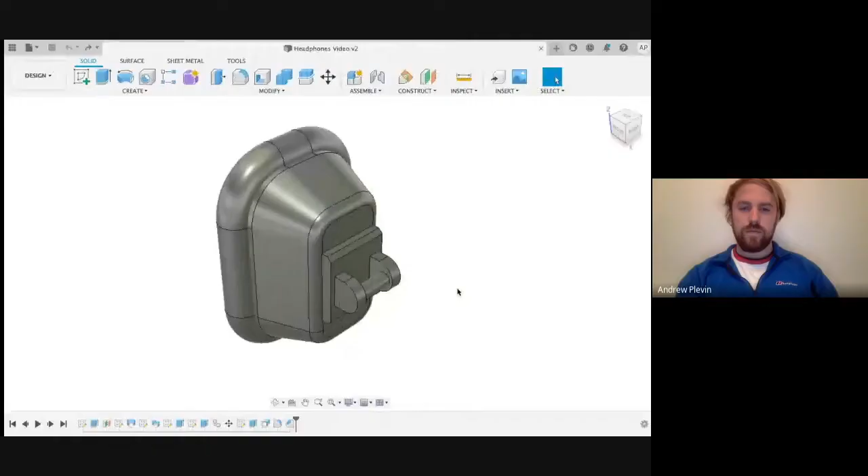So this is the point where you're hopefully up to now if you've been following the videos. In this video, we're going to create the point and the arm that connects to this hinge point here. We're going to start by creating a sketch on this inside face of our hinge.

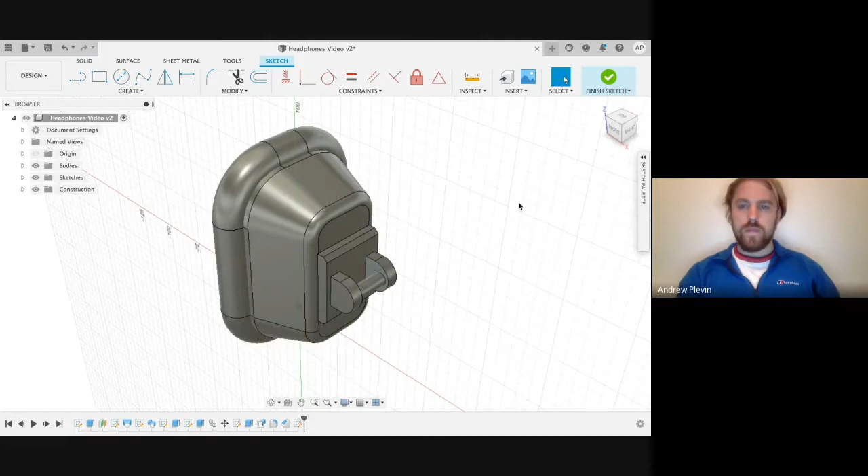We're going to zoom right in just so we can use our anchor points a bit better. And we're going to select the center diameter circle. You'll notice that when you hover over a body, it gives you points that you can try and use as anchor points, so we're going to use this center point here. You'll notice that the cursor changes to show you that it's found that center point.

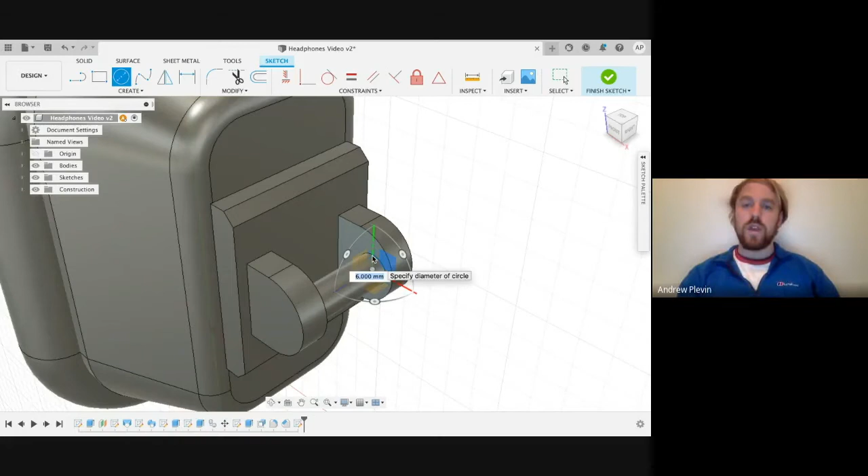Our first one is just going to be 6 mil, so it's going to match the circle we've already made. We're just going to drop it there. Then we're going to use the offset because we want to expand this out, by 2 mil this time. And we're going to click OK.

Then we're going to click Finish Sketch, and we're going to select Extrude from the Create panel.

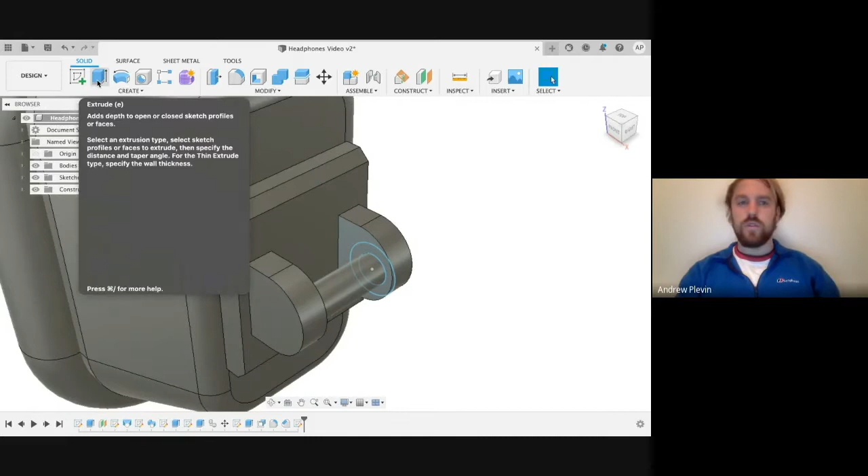Now, once again, you're going to need to zoom in and make sure you're selecting this small outer bit. This is the bit that goes further than our original body. So we're going to select both of those.

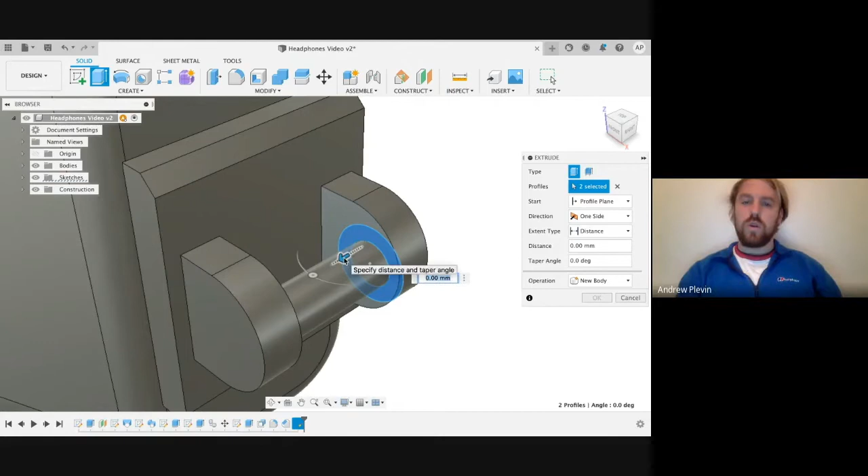But this time when we create the extrusion, we're not going to use the arrow or type in a value. What we're going to do is rotate around and click on the other inside face. You'll notice that our distance changes. We're going to change it to object, and it's going to be to this one.

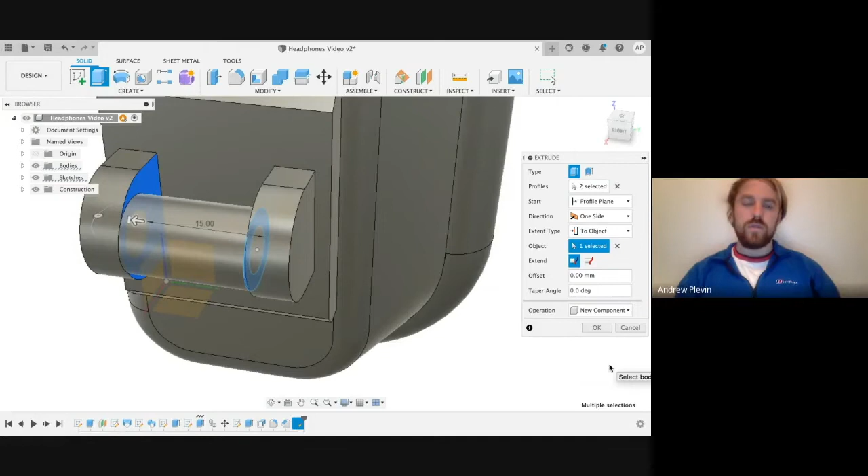This time though, in our operation, rather than join, we're going to have a new component. So once you've done this, click OK, and you'll see that it's added it here as opposed to in the bodies folder.

So at this point, we've got our component, and if we double click on it, we can rename it. This is quite helpful to do early on, as opposed to when you've got a massive selection of different components in your browser. So for now, I'm just going to label this hinge arm.

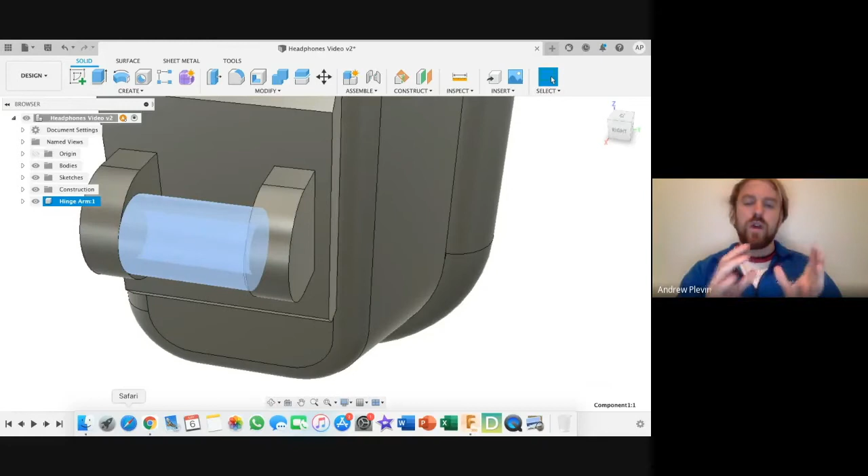And then if you look at the bottom, we've got a timeline of what we've created. In this, you can see all the different features and all the different tools that we've used to make our model so far. Later on, this is going to look very cluttered.

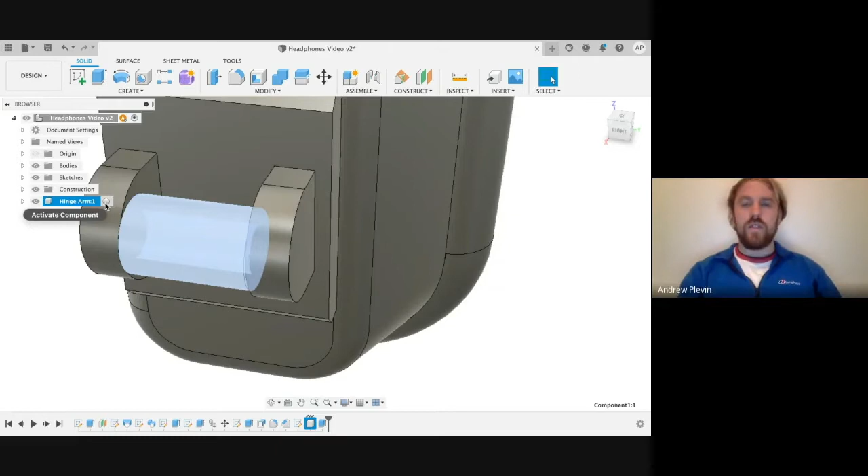So what we're going to do is hover over our component in the browser, and click in this circle to activate the component. What this does is it captures its own timeline within that component. It just means when you're trying to find different features that you've used or added, it's a lot simpler to find them.

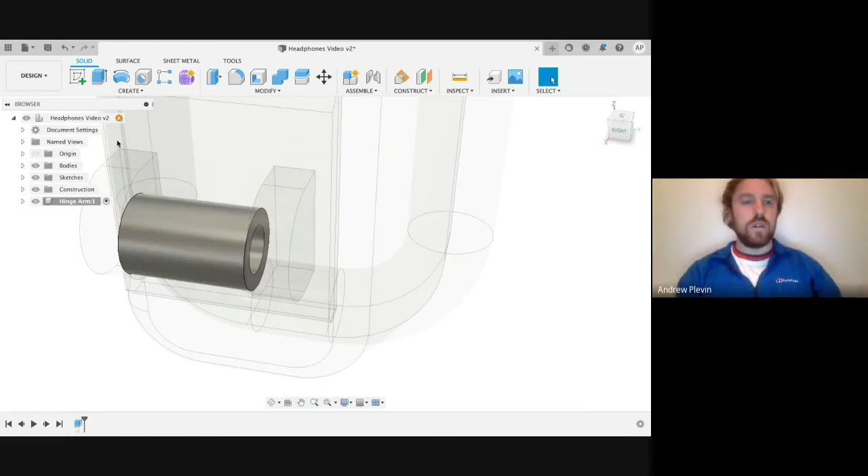So now what we're going to try and do is build the arm up from this circle, because we need it to extend out to be an arm to link to. So what we're going to do is create a sketch, and we're going to select this side face here.

What we're going to do is add a 2-point rectangle to this. We'll go to this center point again. Notice our cursor's changed, and we're going to follow it along, and you'll notice it adds little dashes to show that we're following that line.

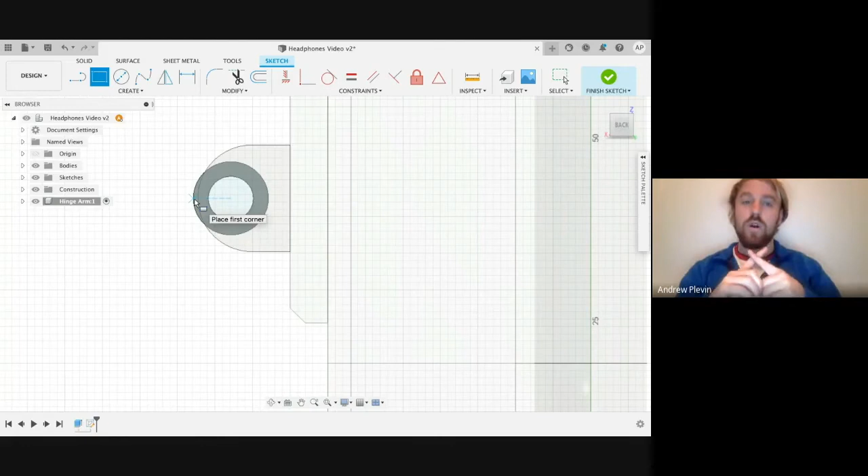We're going to follow that out till our cursor changes again to a cross. This is giving us the X factor, so this is what we need, showing us that it's linked to that edge of the body we've already created. So we're going to click there as our first point. It's not going to link to the one on the other side of the body, so for now we're just going to click at a random point, not too far along and not too far in.

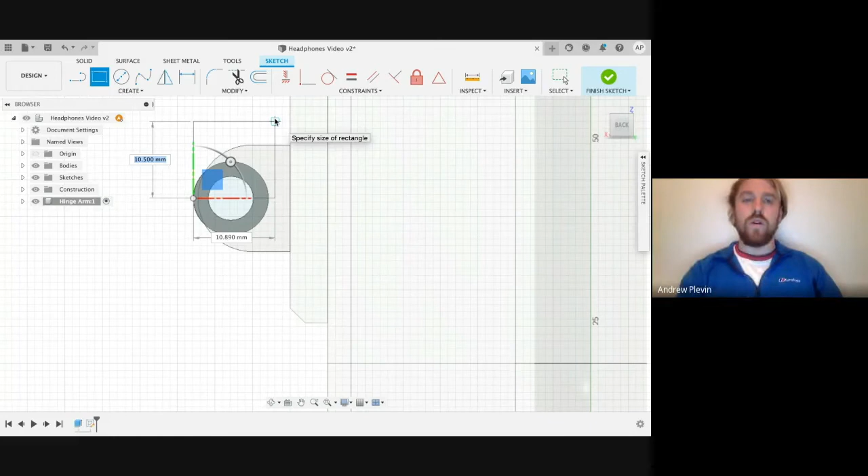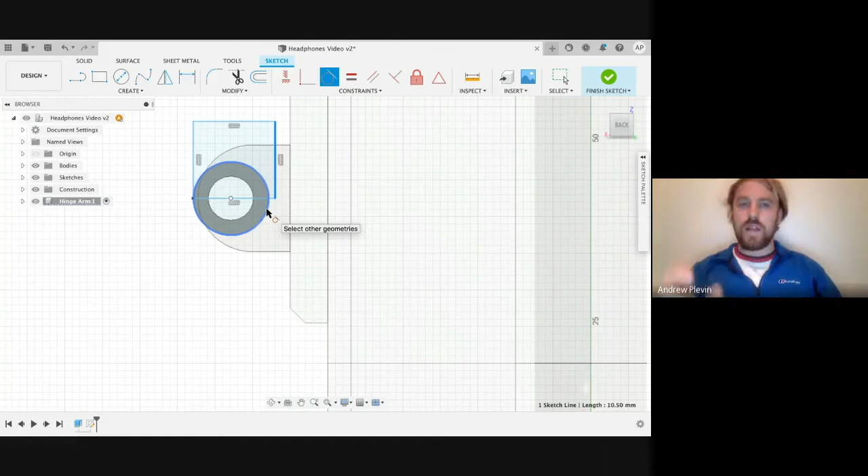So in order to make this edge here level with our circle, what we're going to do is select tangent. This means it intersects at only one single point. We're going to select that, make sure our edge is selected, and select the outer edge of the circle. You'll notice that it's added this constraint, and if we click on it, it tells us the constraint that's been added.

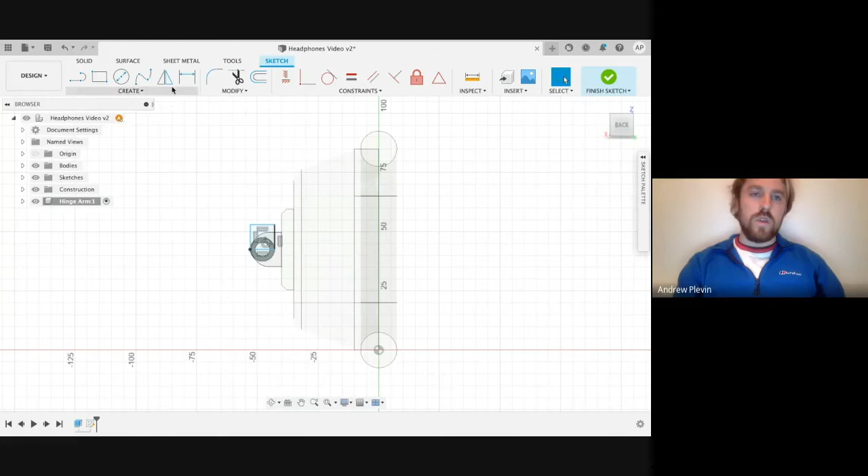Next, we're going to look at expanding this arm out, so we want it to expand out slightly past the top of our earphone piece. To do that, you're going to select sketch dimension, which just controls the size of something we're making. So if we select this edge to the left, our vertical edge, and drag it out and click again, it's going to let us type in a value. I'm going to go with about 80 mil for this one, then press enter.

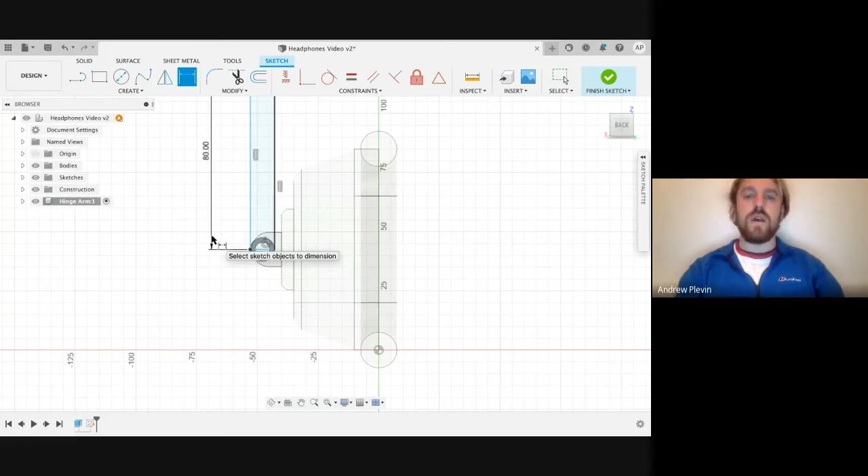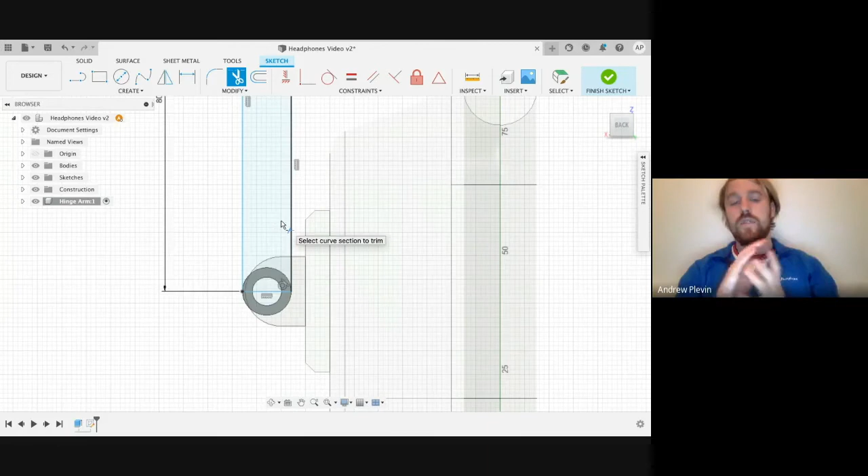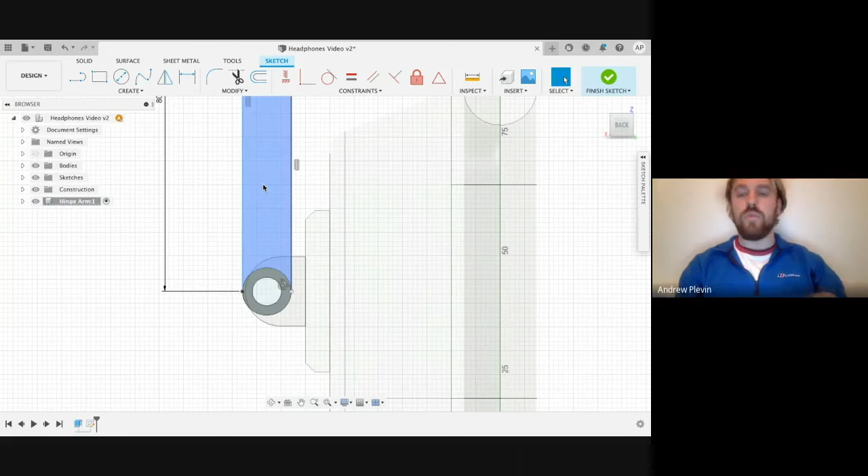You'll notice that it's extended it out by the measurement we typed in. But if we look at our sketch closely, we'll see we've got this line that we're not going to need. So what we're going to use now is the trim tool, which just cuts away any sections of our sketch that we don't need. If we hover over, you'll notice it turns red, showing what's being cut away. The trim tool will cut away an edge from one point until it reaches another point of another body, so we're going to trim that line and our other two lines. We should just end up with this shape above our circle. So we're going to click Finish Sketch.

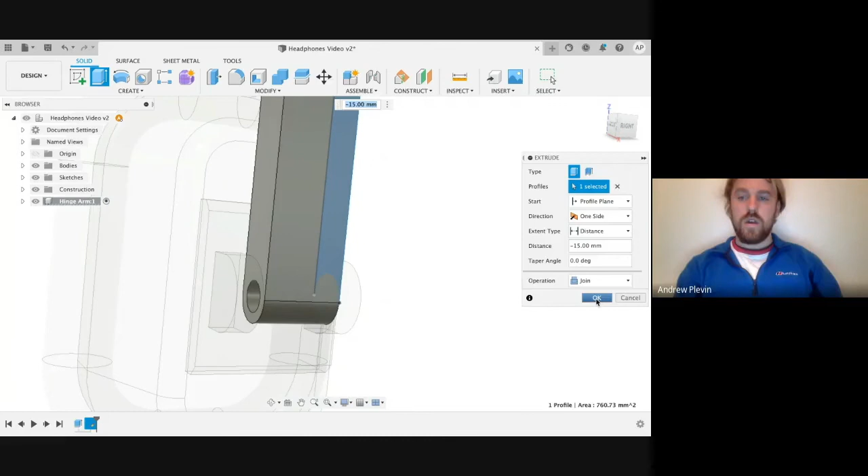Then once again, we're going to use the Extrude tool. We're going to select this shape that we've just made in our sketch, and extend that to our other face. This time I'm fine with it being left as a join, since we want this to just be a single piece. So click OK, and that'll be created.

So now if we activate our entire design again, you'll see that we're starting to develop our piece that's going to go around the top of our head. We're going to leave that video here for today. Hopefully now you've got a bit more of an understanding of the difference between bodies and components, and also how to use a couple more of the different sketch constraints.